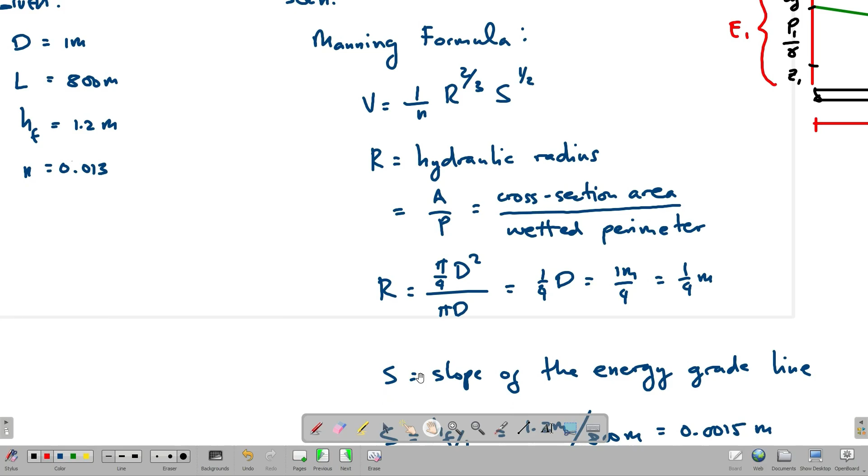So here's our formula for velocity, and its components: hydraulic radius, and S, which is the slope of the energy grade line. This is the velocity equation: 1 over N, R to the 2/3, S to the 1/2. There's a different equation for English units which has an additional factor. This equation is only applicable for SI units.

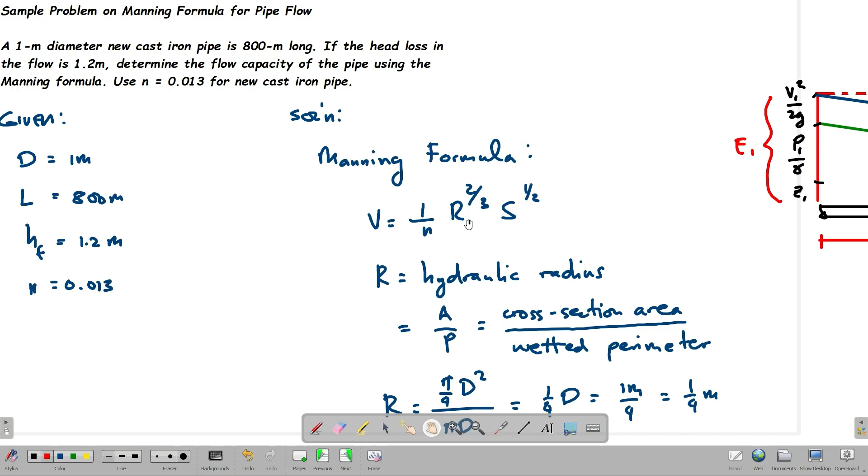Again, this is the velocity equation, and here's the hydraulic radius R, raised to the 2/3, and S raised to the 1/2. S is the slope of the energy grade line.

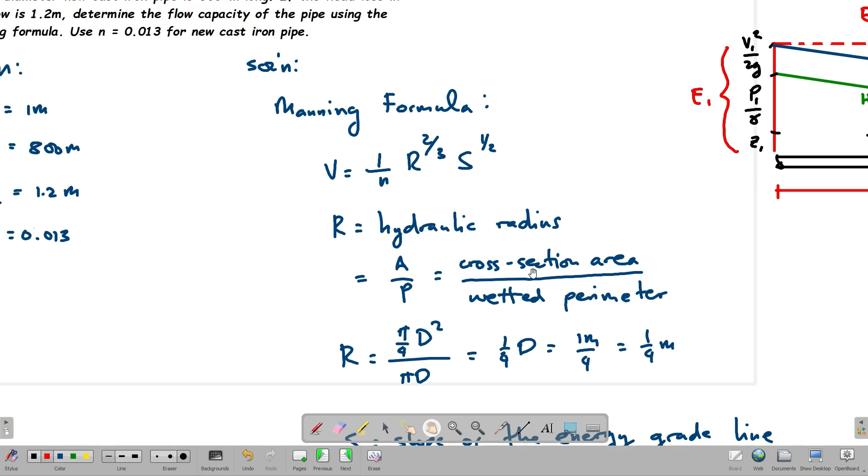Let's discuss the hydraulic radius. Hydraulic radius is just the ratio of cross-sectional area to the wetted perimeter. If we have a circular pipe, let's draw it. For pipe flow or flowing closed conduits, the requirement is that it must be flowing full, meaning the entire cross-sectional area is filled with water or liquid.

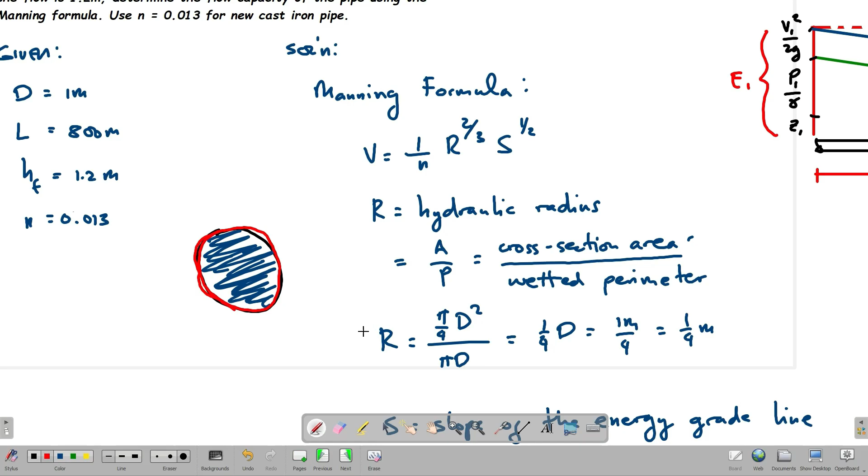So the pipe cross-sectional area is the whole area filled with water, and the wetted perimeter is the perimeter outside. What is the wetted perimeter? For circular pipes, the cross-sectional area equation is pi over 4 d squared, and the wetted perimeter is just the circumference, which is pi d, or if using radius, 2 pi r, while the area is pi r squared. The pi cancels, and one d cancels, leaving only one d remaining, giving us 1/4 d.

Our given diameter is 1 meter, so substituting, the hydraulic radius for this particular sample problem is equal to 1/4 meter.

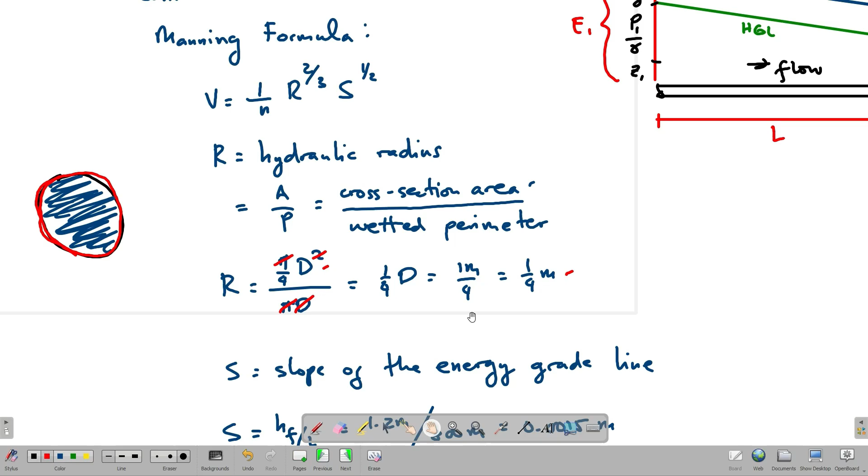Now let's discuss the slope of the energy grade line. In flow, we consider two lines to represent the energy flowing from point 1 to point 2: the energy grade line and the hydraulic grade line. For the hydraulic grade line, only two energy components are considered: the energy from elevation and pressure. This is the HGL, where you can see the level of the water.

If you insert a piezometer into the pipe, the water level rises up to that level. The energy grade line, meanwhile, includes the velocity head. So we have three components of energy for point 1: velocity, pressure, and elevation. At point 2, we have elevation, pressure, velocity, and of course the head loss that occurs as the liquid flows from point 1 to point 2.

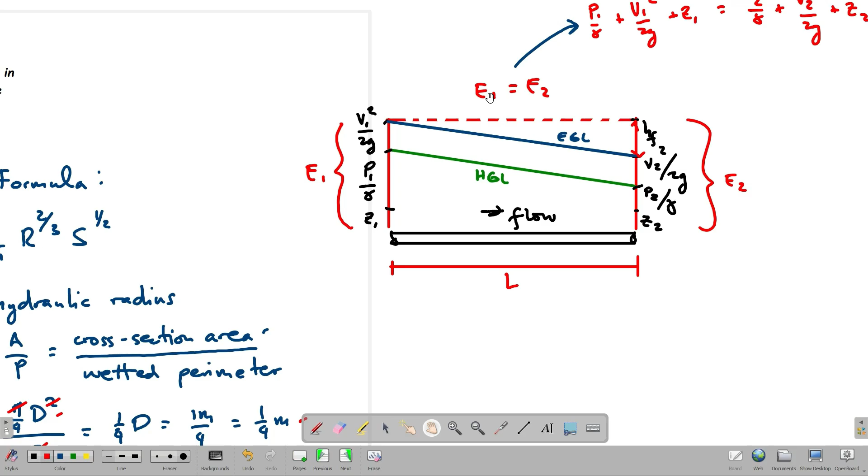Because of the law of conservation of energy, E1 must equal E2. This is where our energy equation comes from - the components of energy at point 1 must be equivalent to the components of energy at point 2. What we're looking for here is the slope of the energy grade line. So therefore the slope of this line, the energy grade line - slope is just the change in y over the change in x.

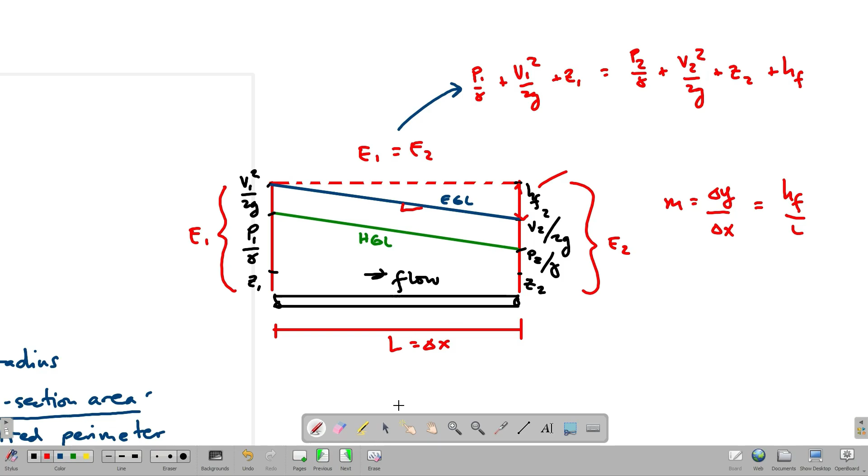So for our energy grade line, which is the blue line, the change in y is actually your head loss, HF. Going back, this is your change in y, that's head loss. Then the change in x is delta x, the length - the change in horizontal distance. So the slope of the energy grade line is just the ratio of head loss to length: 1.2 meters divided by 800.

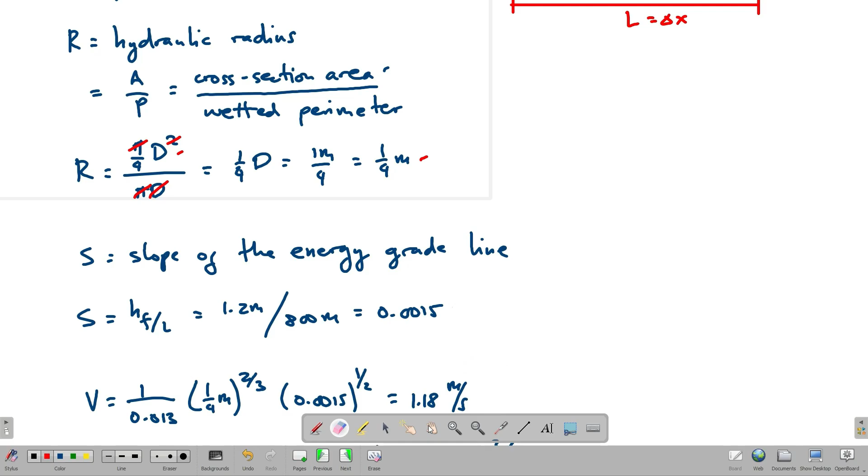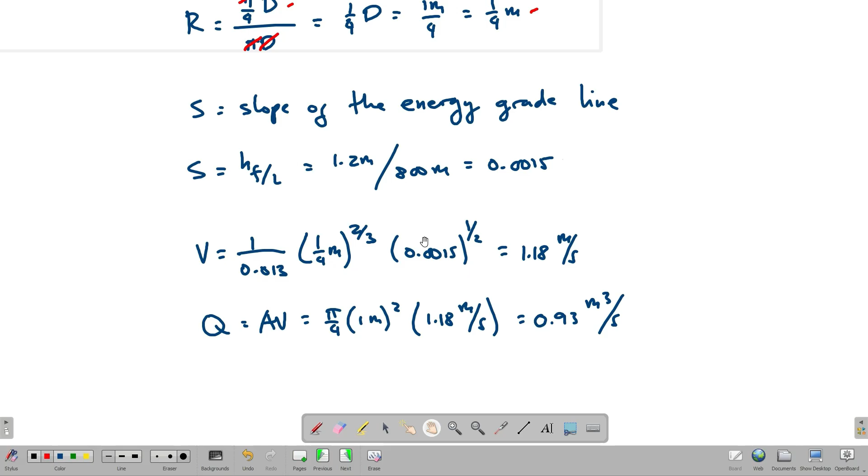Now we have R, we have S, and we have N - these are all the requirements needed to get the velocity. So let's get the velocity: we have N, R is 1/4, and this is the slope. Let's evaluate using our calculator: 1 divided by 0.013, times 0.25 raised to the power of 2/3, times 0.0015 raised to the power of 0.5 since that's 1/2. Our answer is 1.18 meters per second.

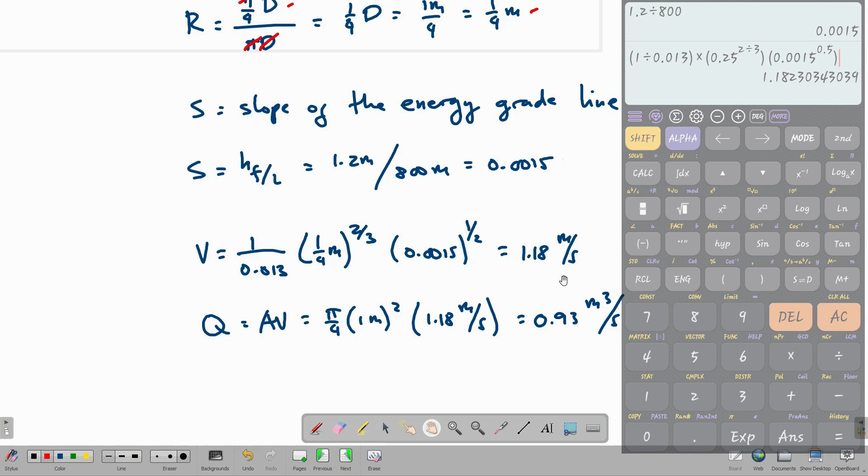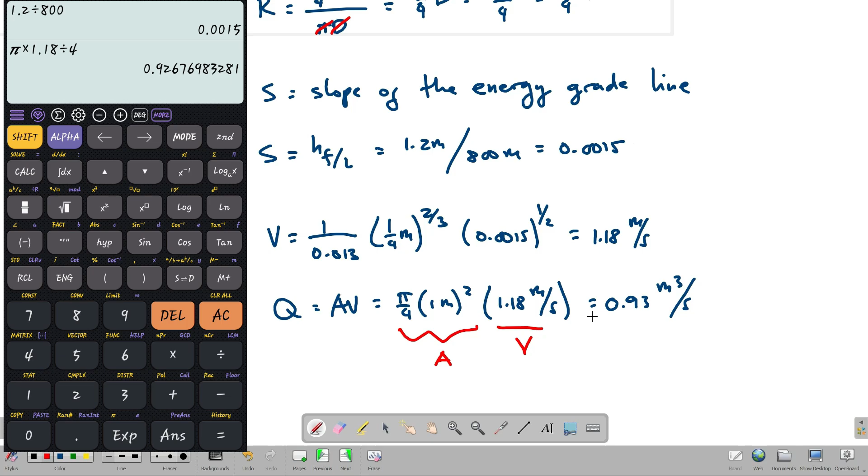So that's velocity, and now we can get Q, since flow capacity Q is what we're looking for here. Q equals AV - this is our area, which is pi over 4 d squared, and this is the velocity. So we have pi times 1.18 divided by 4, giving us 0.926, or rounding off, that's 0.93 cubic meters per second.